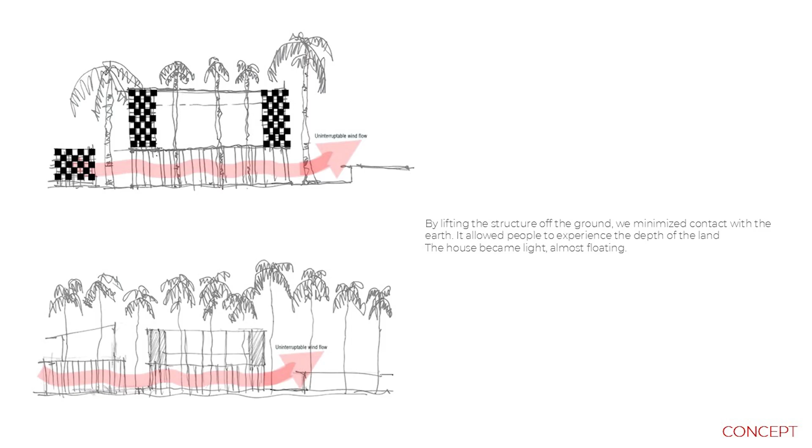We are trying to recreate that with a simple idea. Because of that, we lifted the whole bottom portion of it, and the coconut tree, or any tree, gives an idea about how minimal contact has to be with the Mother Earth. So how do we do that? With this context, we started developing the structure.

You enter from the northern side, and it's a two-bedroom small farmhouse. The Kalyani, or the step well, is on the northern side, and the last one is where we renovated the existing structure. This is how the plan looks. It's very small, with a bedroom on either side. The center is the living room and a pantry space, and the eastern part has a sitting space.

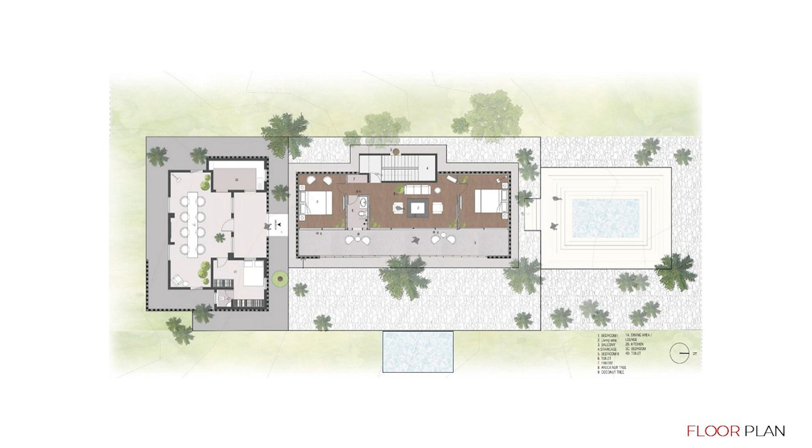The whole idea here was to make sure how transparent, how easily you can build in this entire thing, which gives some kind of idea about seeing through the entire farmhouse. So that was the main intent of it.

We also worked out our own wall system. The external layer is fly ash block, placed in such a way that it reduces the total load, and it also creates a shadow pattern between each other, so it reduces the heat volume further.

For these to insert, we took just 4mm thin rods and placed them alternatively, and the backside is a metal sheet and insulation, and the internal part is cement boards. So we've used very simple materials to do this.

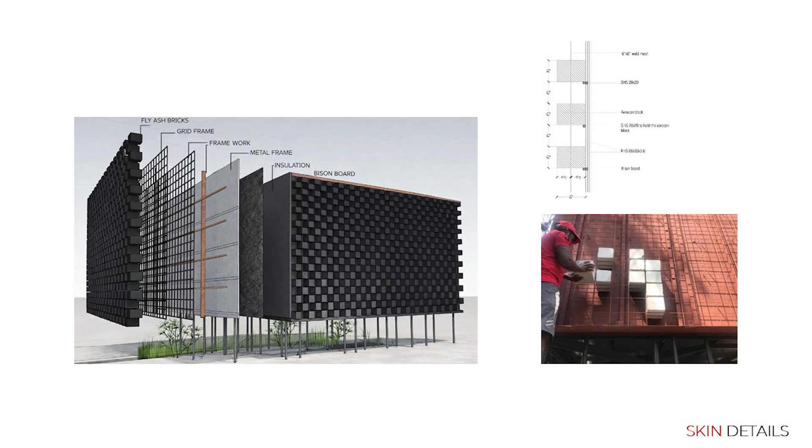We chose the color black. I think it merges with the entire landscape, and it also creates a lot more shadow feel to that monochrome. That's the small reflecting pond with that entire area, and it feels like it's floating.

The whole structure is placed on 3-inch small MS pipes on top of which the whole building sits, and also how the tree merges through that - all trees are part of the program. In most of our practice, trees are kept either inside or as part of it, and it shows.

We also consciously made sure the structural element is part of it - we didn't want to hide the structural element at all. We wanted to express it in the right way, and it also becomes part of the design.

Cement board is a great material - this is the first impression we had when we went to the site, how we visualized the sunlight passing through that, and we tried to recreate it. Lighting design for this building was a challenging thing.

This is how it just merges through the entire property. We took inspiration from a South Indian temple and how they light it - it's called Deepotsav. Through that, we started lighting the entire thing in a subtle way, so it doesn't overdo the lighting or go overboard with it.

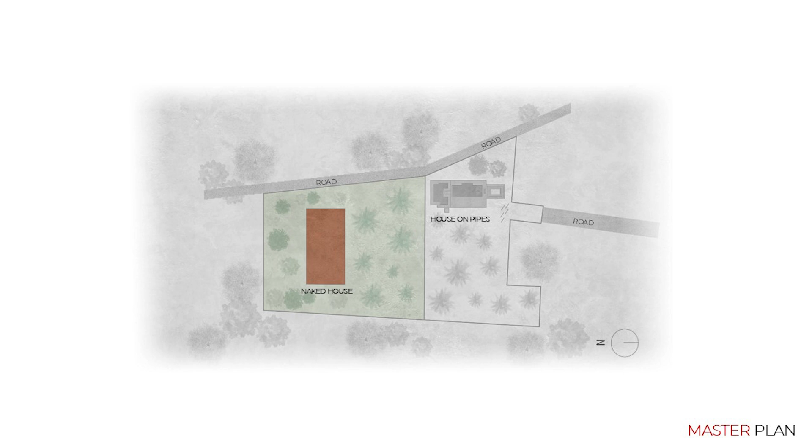This is the site, house on pipes on the right-hand side, the naked house at the end of the property. It's an under-construction project now.

There are totally 7 rooms, ground floor 4 rooms, upper floor 3 rooms. We have made these boxes in a staggered way, so it's like a village. If you go to the village, staggered patterns create some kind of enclosure, a narrow lane in between these areas for negative or incidental spaces to sit around.

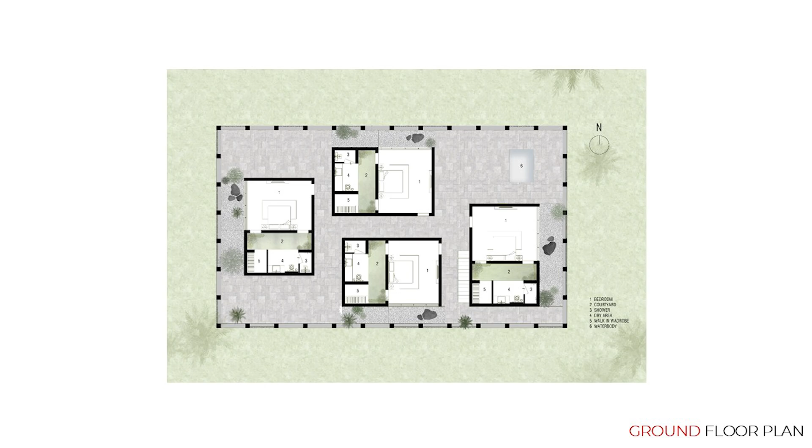We also added a perforated jali wall around this to get shaded area. It's very simple in design, and brick was, I think, the only option we had because it's locally available and easy for the people to make.

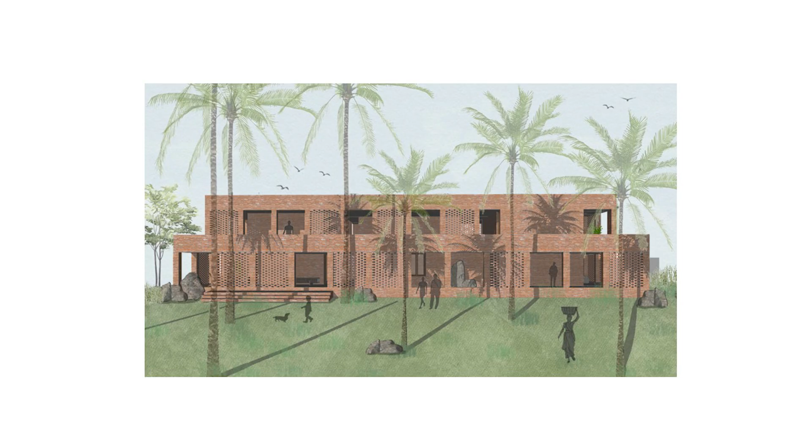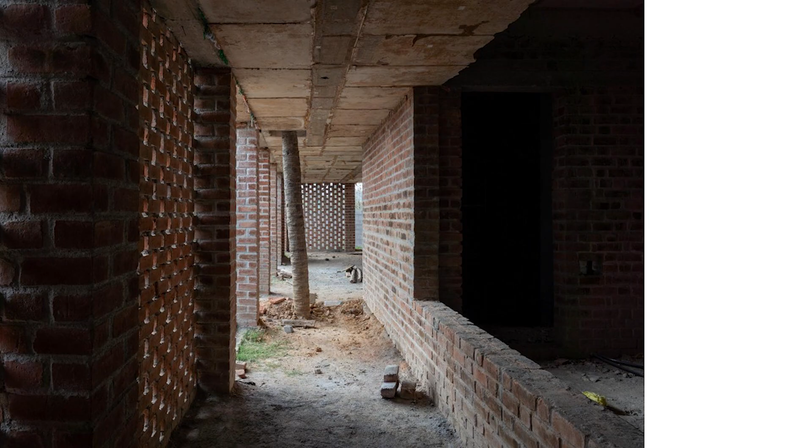So we used that. These are some sketches or graphics of how the spaces work. These are construction images showing what's happening right now - how the light and shadow effects work on the brick, working with local masons, their quality of work, and how the tree becomes part of it. That's how the light and shadow effects come about. In a couple of months, I think it will get completed.

Yeah, how we celebrate the tree as part of the program.

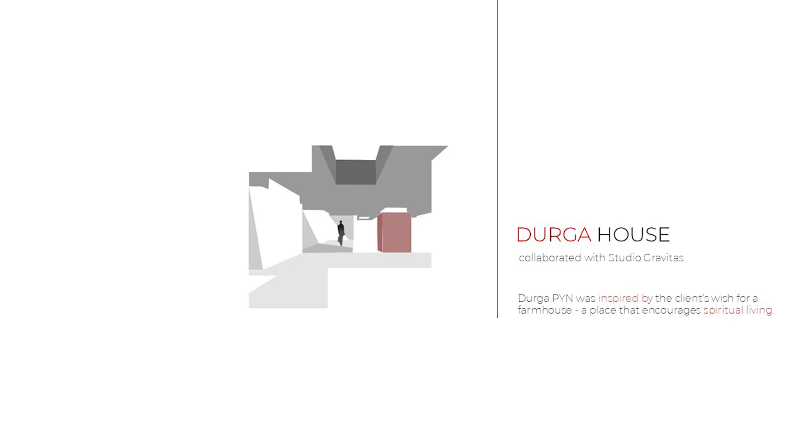Another project we collaborated on with Studio Gravitas is the Durga project. I think this is one of our favorite projects now. It's located in Chitradurga, it's got a history, and it's inspired by the client's wish for a place to be encouraged in spiritual living - a farmhouse for spiritual living. The design begins with an attempt to capture the spirit of the place itself, Chitradurga, the architectural and territorial legacy of the Durga, and certain reclaimed elevated ground to take advantage of the surrounding views. The house becomes a defined territory within the landscape.

With this kind of project, we started understanding the local materials and the age-old method of construction, how they used to do it - first the initial part of brick, stone, and masonry work. Actually it's the gare, or plastering work, how they used to work with that. From there we took inspiration - structure, support, and shelter.

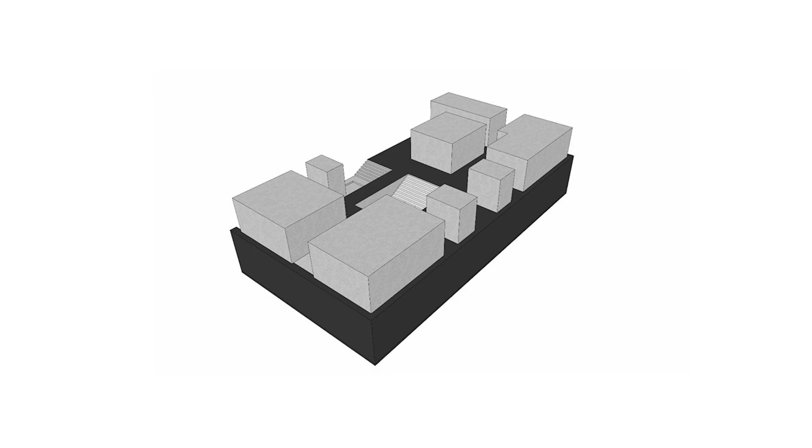These are mantap kind of structures. The program becomes the substructure, and then shelter, and this is how we carved out the ground floor plan and first floor plan.

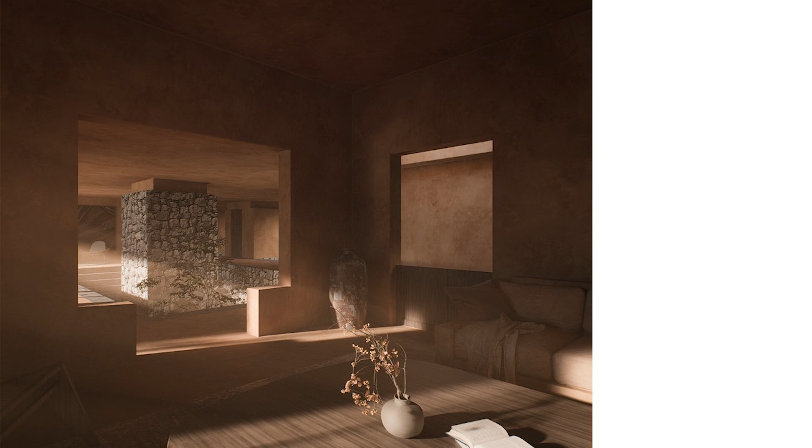This is how it looks now, some of the images. That's the temple pillar, and this is where you enter through this property. That's the living room.

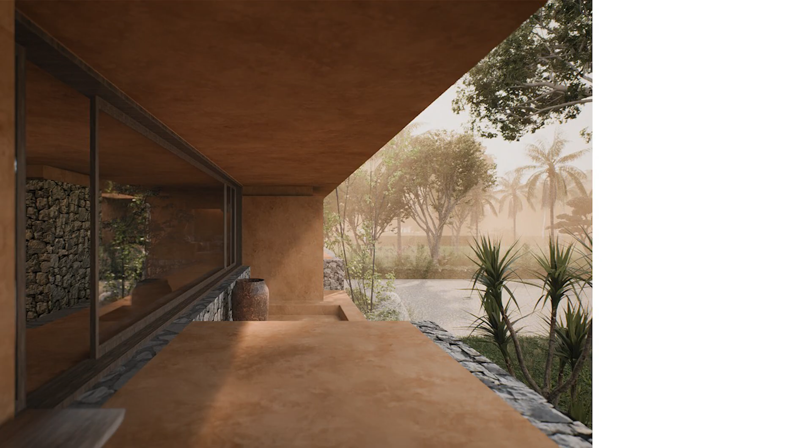I'll take you through the images of the Twin House. This is at the Nandi Hills quarry site. We took the quarry, we're trying to quarry it out of it. Two brothers stay together here. I'll take you through how these spaces are carved out, and the negative of it, the other house, which takes you through this.

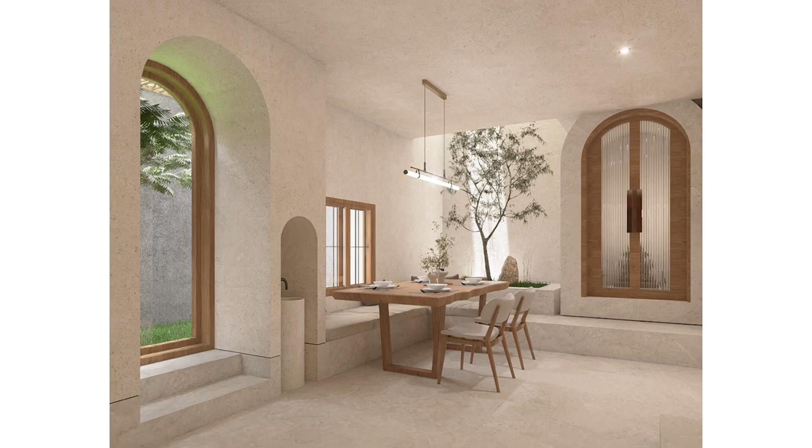Yeah, some of the construction.

Yeah, sure. Thank you.